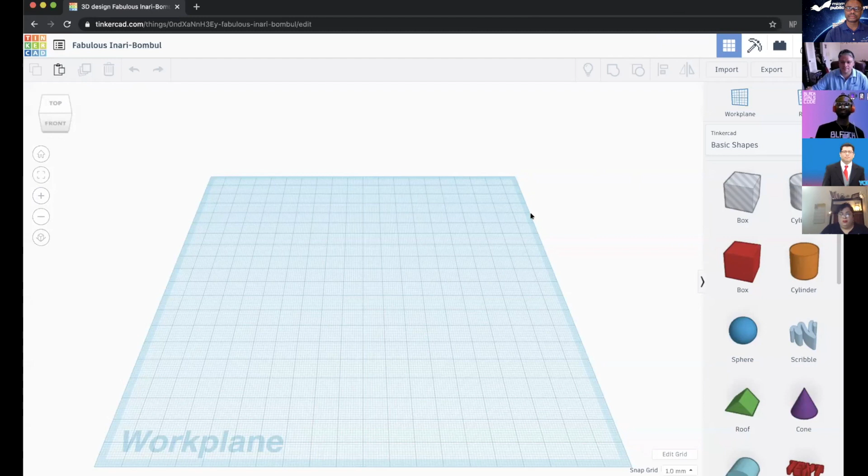So I'm going to start off with over here on the right-hand side. You'll notice that there's a bunch of basic shapes like a cube, a sphere, roof, etc. If you click here where it says basic shapes, it'll have a little drop-down menu of different categories of shapes that you can choose from.

For example, if I were to go to text and numbers, if you wanted to make a name tag or have some numbers in there, you can drag some text and change what it says, like a little keychain or something. Another example is under characters, you'll have little hands, some glasses, a little ice cream cone. These are all pre-made objects that you can bring in here and combine together to create new shapes.

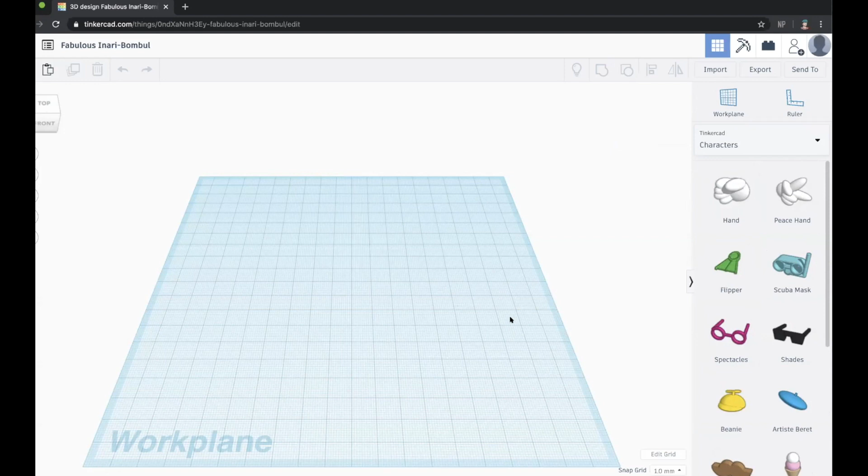For now, we're just going to start with something really simple like this box. To bring the box into the plane, I'm going to click and drag it so that it's over here and let go. Once we have our object in the plane, you'll notice this little window pops up.

At the very top, it says solid and hole. Now what hole is, if I click on that, you'll notice that it kind of goes transparent with these little lines going across it. This will come in handy when you're manipulating shapes later on, because if you want to create a hole inside your object, like a cube-shaped hole inside another cube, you can do this to create some negative space in your project. For now, we're just going to stick to keeping it a solid.

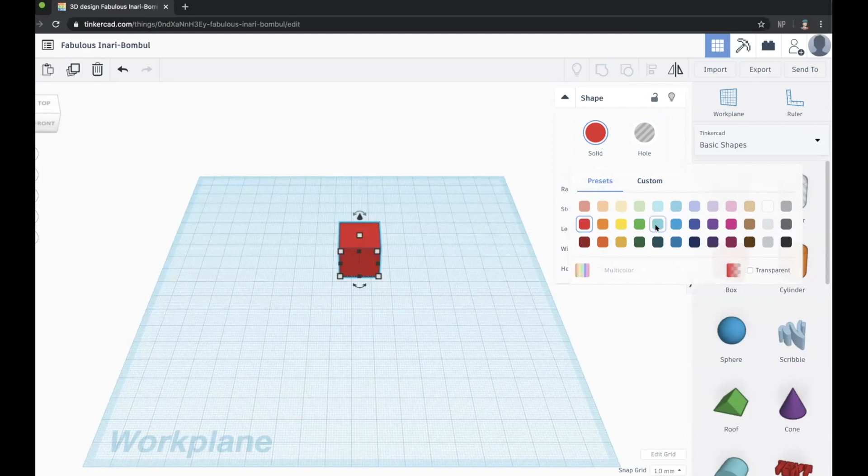When you click on solid, you'll notice there's a whole color palette that shows up. This is really for your own point of reference. This isn't going to affect what color the object is going to be if you choose to print it later on, because that's what you pick a filament color for. But for now, you can just go fun with it and pick whatever colors you like, just for your own viewing. Right below solid, you'll notice there's a couple more properties here. This one here is radius.

You know that a square has these sharp edges. When you manipulate the radius, it kind of rounds off the edges a little bit and makes the corners a little smoother, so the more you drag it, the higher the radius, the rounder it's gonna get. Then down here with length, width, and height, this will make it more of a rectangle, make it longer, wider, or taller. These are manual ways to do it.

Another way to manipulate these dimensions is that you'll notice there's these little markers around your object. If you click and hold this little cone at the top, this will move your object up and down, while this one creates this little circle around it, which will help you rotate your object.

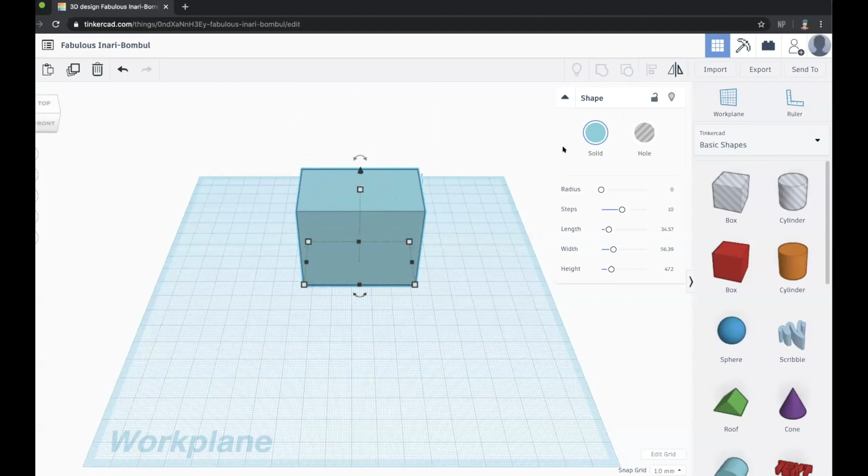Earlier I mentioned going over the different camera views for your object as well, so I'm going to refer to the left side for a moment, this cube that's right here. You'll notice it says top, front, and so forth on it. Let's see what happens when I click on front. You'll notice it moves your plane automatically to give you the front view of your object.

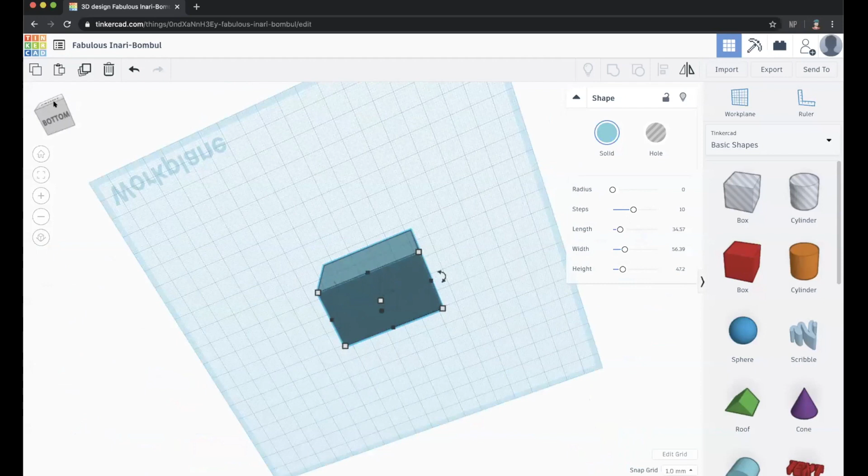If you click and hold this, you can also move it around manually. Clicking on the actual word will snap it to that view automatically, or clicking and dragging it will allow you to move it freely. This is good so you can get different angles of your object as you work on it. If you click on this little home button down here, it'll bring it back to the default view.

Down here, you'll notice a plus and a minus. This is to zoom in to get closer on your object or zoom out to see it further away. Those are just some of the basic functions of when you're getting familiar with your workspace.

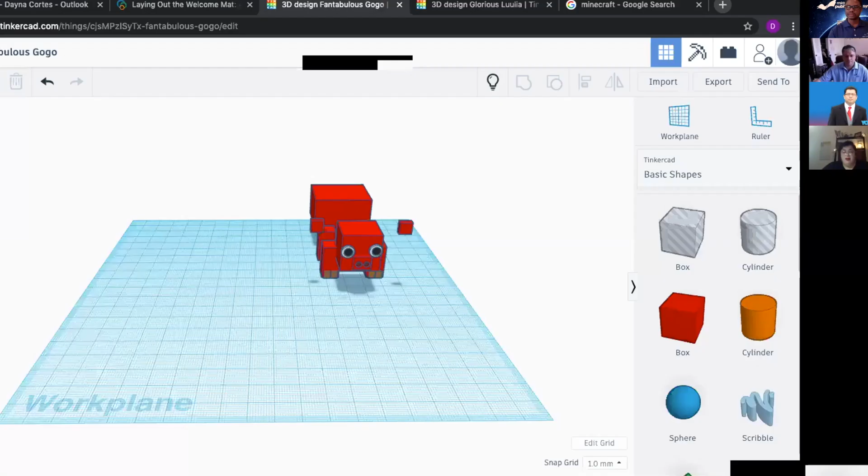Hey guys, I know some of you have heard of Minecraft, right? Anybody who's heard of Minecraft? Type it in the chat. I'm not that familiar with it, but I know the kiddos love it and always play it.

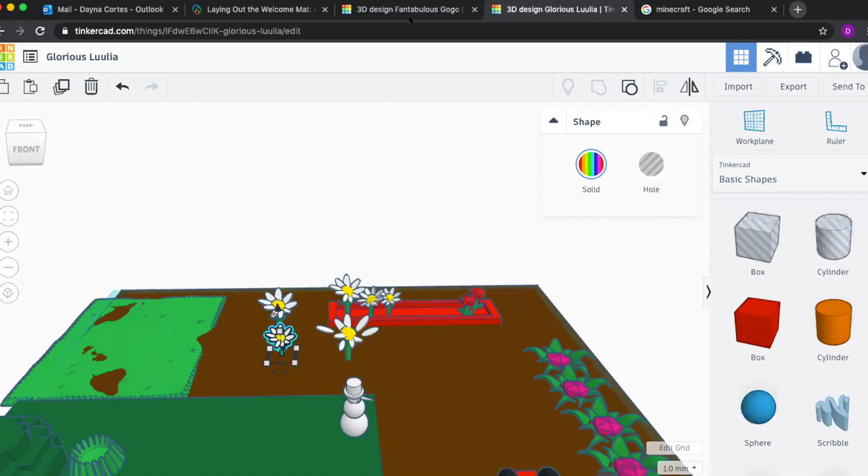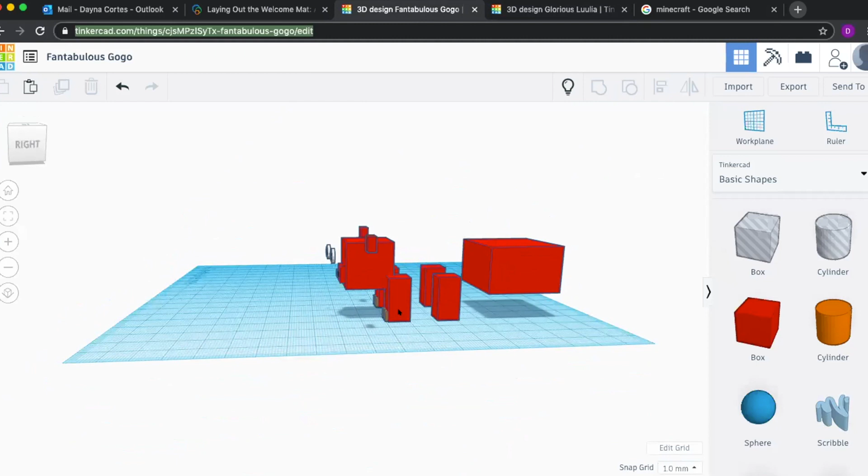So I wanted to show you guys some cool stuff. I got inspired by Minecraft, actually researched it, and got inspired to create my first creature here. Well, he's not a little creature, he's actually a cute little pig. I know he doesn't look like a pig right now, but I wanted to show him in separate pieces so you can see how, with just one object—well, I stand corrected, I actually used another shape here, the cylinder shape. But the body, from the toes to the nose to the ears, is all made out of that one cube. By the way, everybody's saying it does look like a pig, and they guessed it right away.

So I'm going to show you my cute little pig over here. I'm actually really proud of this pig. I wanted to show you guys how, out of these blocks, I was able to create this Minecraft-inspired pig, and it was really fun doing it. It takes me a long time to actually do it, but I know that if I can do it, anybody else can do it.

3D Tinkercad has been really fun, just exploring it with my coworkers, because we've been able to use this feature where we share one link and are all able to work simultaneously, even live, together in this collaborative project that we created.

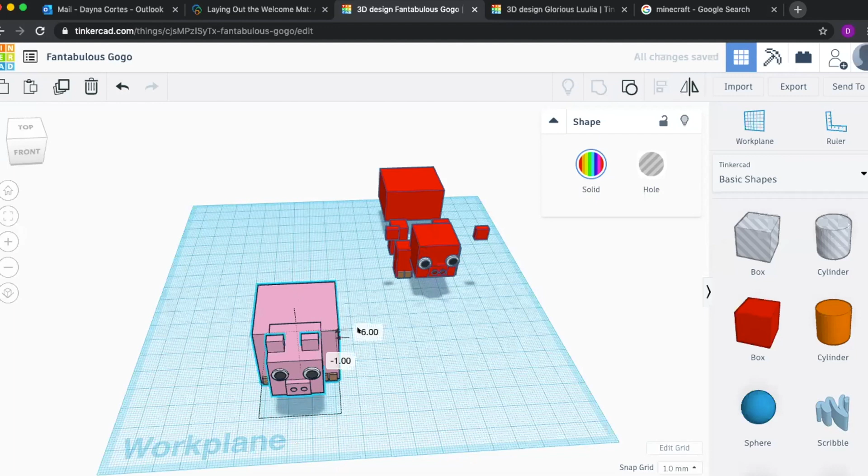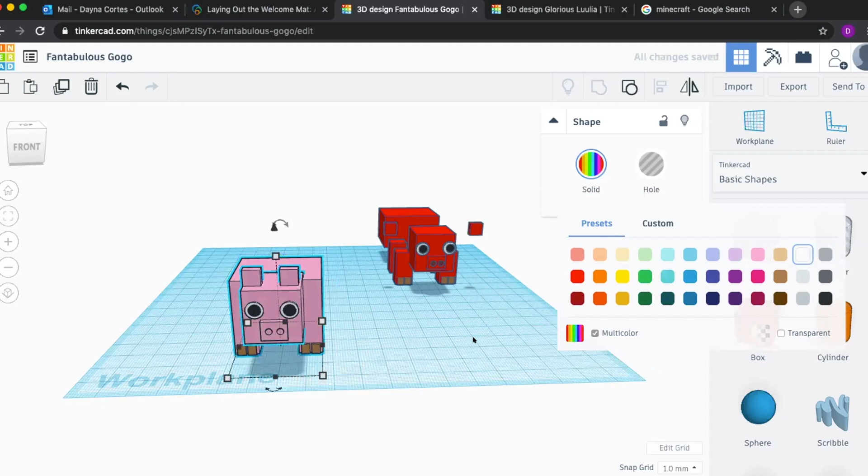So I'm going to bring my little pig right here. Actually, I wanted to show you this cool thing before I move on—if you notice, my pig has all its colors. This cool little function my coworker showed me the other day: he said, I didn't want to group it because it would lose all its colors. He said, Dayna, just go click on the multicolor preset and you're good. So I went ahead and created my cute little pink pig.

Now I'm going to copy my pig. Let's go to our option right here, we're going to copy him, and I'm going to take him to this little farm that we all did together. This farm began with just simple objects, and thinking, what can we collectively do together? So my coworkers Eddie, Hector, myself, and Jaden all worked together and were able to input all of these cool things together. So let's go ahead and paste my pig.

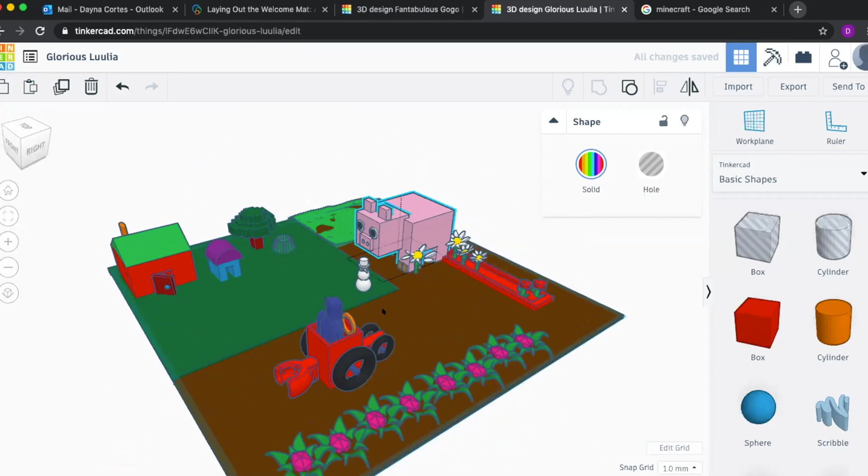Now my pig is out of place and completely out of scale, and he's stomping all over my flowers. So we want to make him the proper scale. Let's click on the Shift button, and you see your little marker here—you hold it down and bring him down. There, now he looks like a pig that actually belongs in this farm.

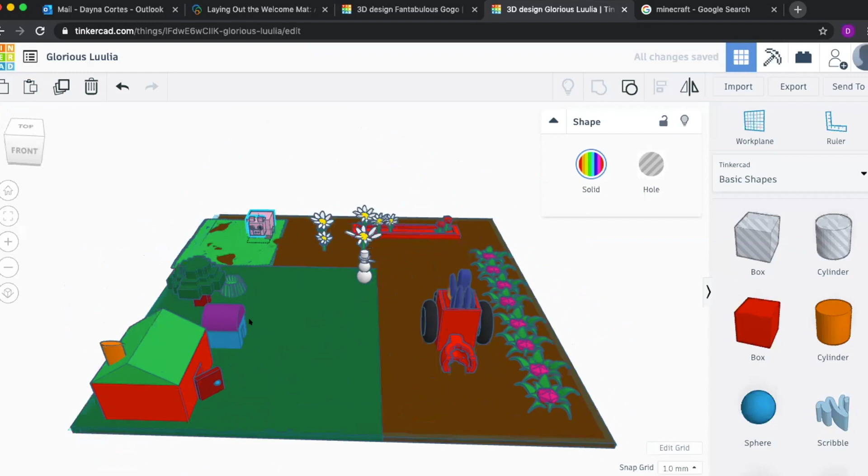So he looks a little lonely. Let's go ahead and copy him again. Let's not paste the other one yet, because if I immediately paste it, then— oh, I actually already did. So let's give him another little friend, let's paste another friend in here. And there you go, he has 3 little pigs.

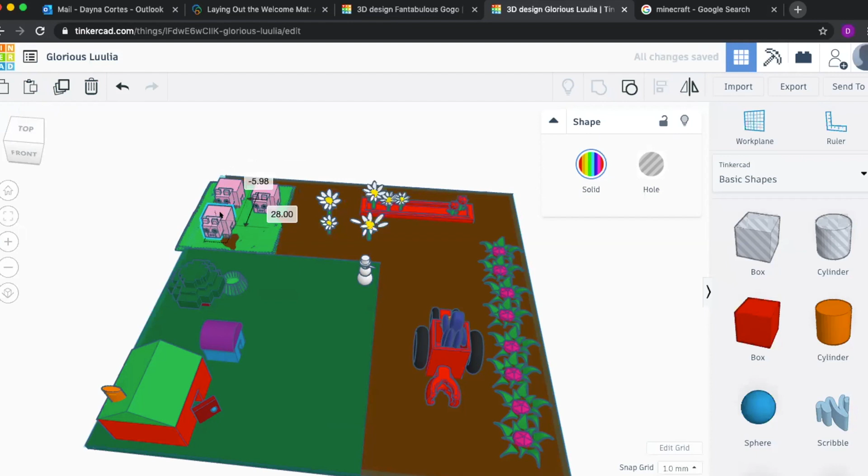So another cool thing—Elaine was just asking, how did you get it to that spot? Just a reminder that you copied and pasted. Correct, I copied the object here.

So you see how he's selected, it's in blue. I go ahead and copy it, and then I could go ahead and just paste him. And there he is. Now he's got 4.

Cool. Any more questions? No, that's it.

Awesome. So I actually also worked on these flowers. It took me a long time to get these flowers. Can anybody guess, just by looking at it, what shapes did I use to make this flower? I purposely left this flower undone so that we could all see it. Someone said oval.

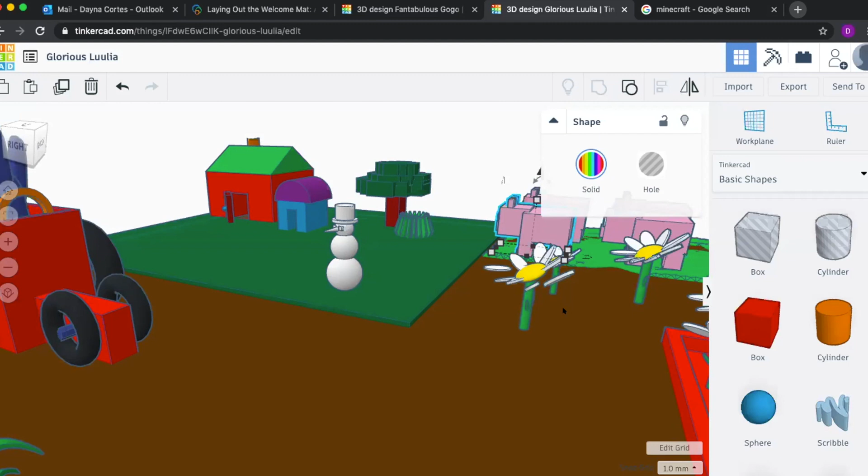What else? It looks like the chat room is saying oval. That's what everybody thinks, oval, right. I used a cylinder and I definitely used a sphere. So good eye, guys, someone said cylinder also.

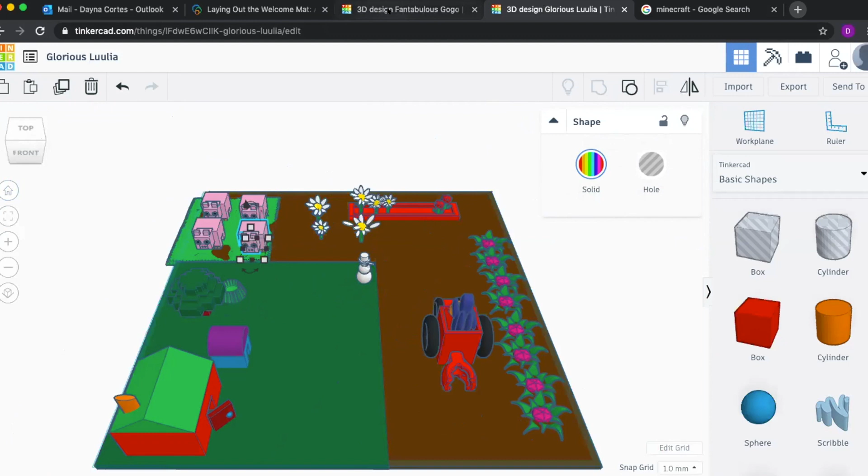So once you're done here, remember I copied and pasted my pig. I copied the pig, I go back to Tinkercad right here. Now it's going to load and see, it's going to be saving your work right here at the bottom. Thank you for that question.

And I apologize for that. You see, once it brings me back to my designing platform, and then I could go into my farm, you see my 4 little pigs? This is in real time, so that's the cool thing about it.

Let's go ahead and tinker this. And voila, I'm back here again, and I have my 4 little pigs, and that was easy, right?

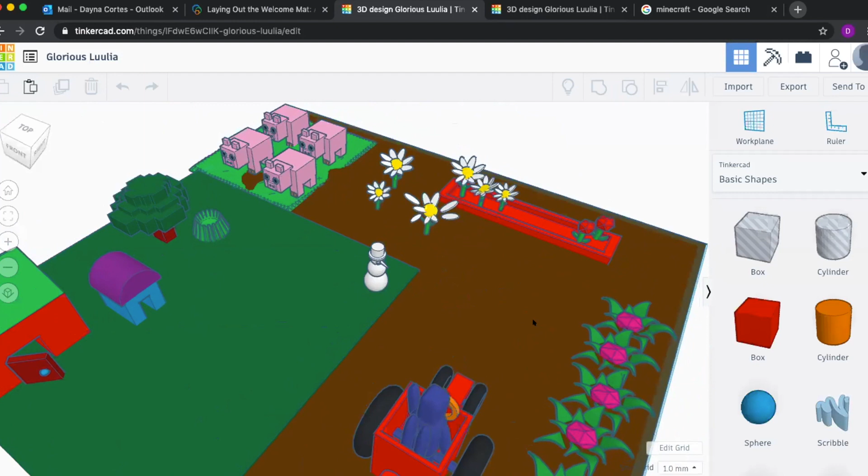Mm-hmm, awesome. So now that I'm done with this part, I'm gonna go ahead and pass it over to my coworker, Eddie, and he's gonna show you how to create this cute little house over here. Eddie, you ready? Yes, I'm ready.

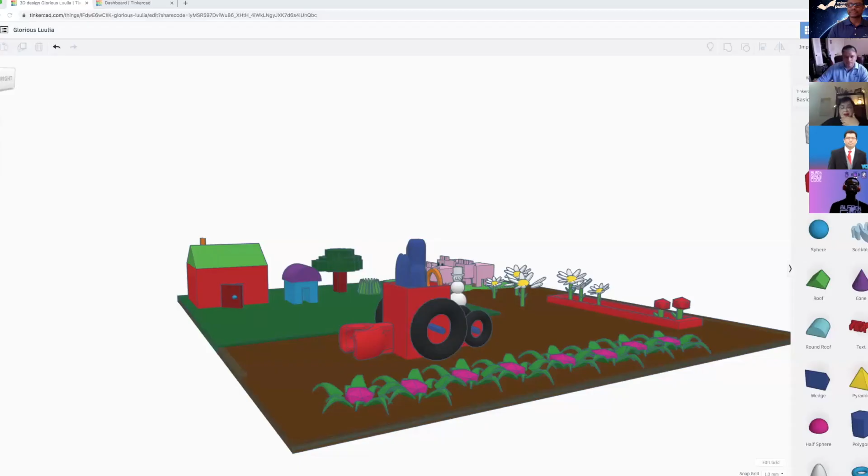By the way, we see you guys have some questions, so we'll take some questions if we have a chance at the end. I see one person's asking about Blender. That's right, Blender is a pretty cool platform that I know that if you start using like Tinkercad as a beginning tool, you could really start helping yourself to build skills into Blender. I haven't personally worked with Blender, but my friends who have, that's what they keep telling me, like you really have to practice, and Tinkercad is a good beginning.

All right, so can everybody see my screen? Yes. Excellent, so thank you very much, Dayna, for your wonderful explanation on how you created the little pig. Now we have 4 pigs there. And as you can see, these flowers that she created are all grouped, which is very interesting.

When an object is grouped, you can move it around just like this and place it. And if you look up here, this little button, when you highlight something, this button here is ungroup, which is Control-Shift-G. If you press that, then you could ungroup it, and then you can manipulate the object separately.

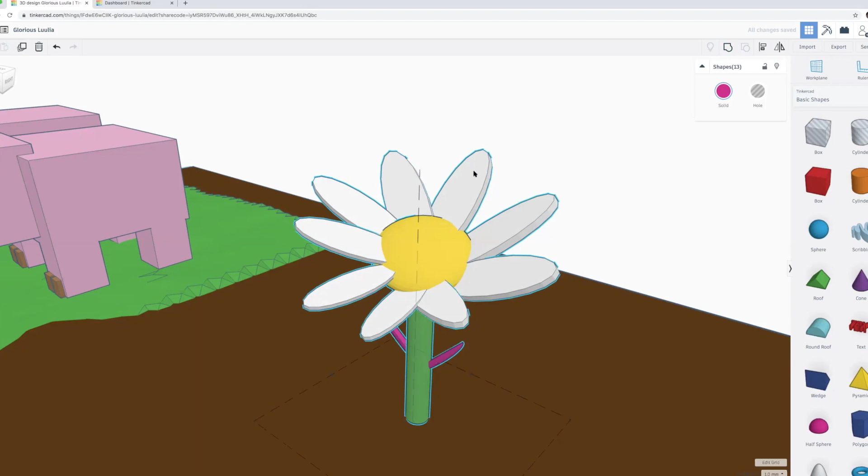I don't know why it's not doing it right now. Nope, doesn't want to do it. But this one's already ungrouped. So over here,

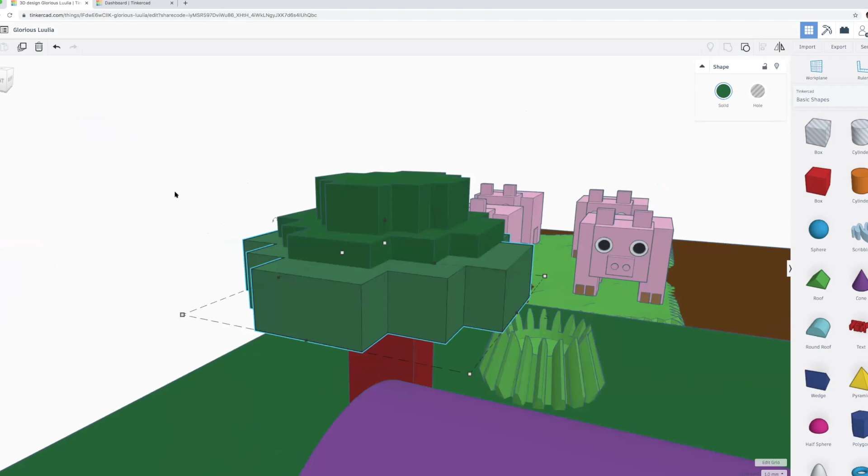I'm going to show you guys some of the Minecraft inspired objects. This one over here is a Minecraft inspired tree. As you can see, it's made up solely of blocks, multiple blocks, and it's only the box. I literally just made this out of boxes and I grouped them together.

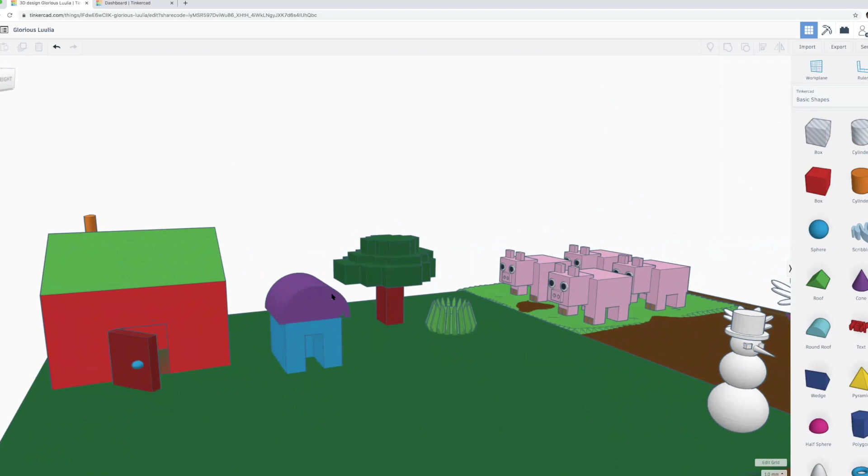And I'm gonna show you guys one of the other objects over here is this barn. So there's 2 different types of barns here. One is a simple barn with a curved roof, which is like a round roof. And if you can see, there's an empty space inside of the box over here.

And I'm going to show you guys how I did that. And then over on this one, you see there's a negative space created indoors to the barn as well, and a little barn door that's curved, that's sticking out. So I'm going to show you guys how I did that.

And one of the beautiful things about doing this is you can make almost anything that your imagination can come up with. And as Marlon was saying, it does tie into the creation of video games, artwork, architecture, all sorts of different jobs that you can be doing.

So I'm going to take the box. I basically just dragged it in, just like Jaden explained. And I'm going to shape it. Now there's two ways to shape. One is just by dragging the corners and making it the size you want.

Or you can go here and manually type in the length, width, and the height if you have exact measurements that you want it to be. So I like just to drag it.

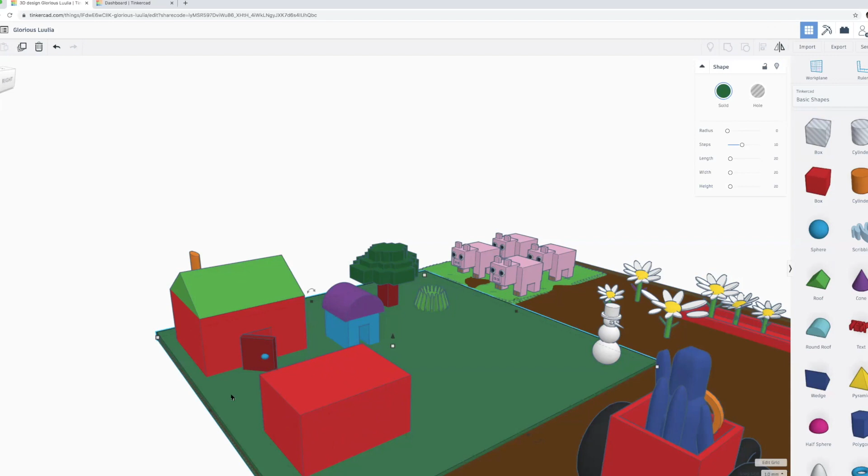Now, one of the neat features is this is the Workplane, and it's where everything you drag onto here is going to be basically touching the bottom, the Workplane, where it's at right now. So right now my roof is on the ground, and I can place the roof by grabbing this little arrow and moving it up and then dragging it.

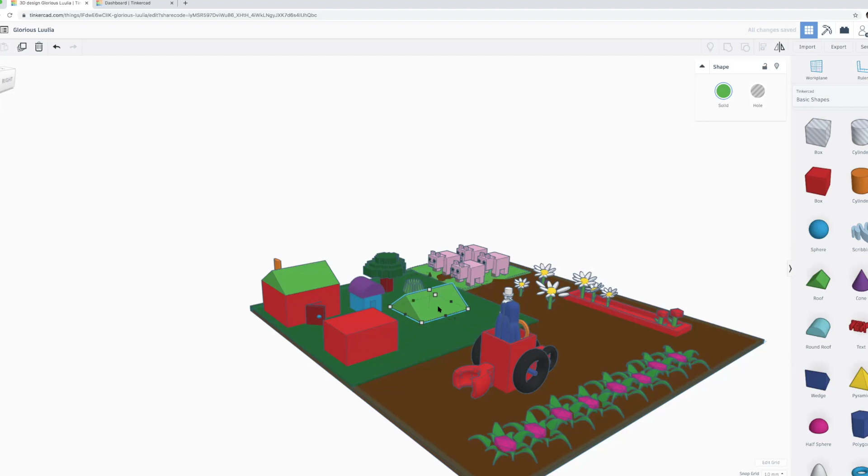But that's kind of hard to do. That's one way to do it, but that's not the most accurate way to do it. So one of the neat features I'm going to show you guys is this: you can actually change the Workplane by clicking up here, and the shortcut is W.

And when you click on it, you see that wherever it goes, it changes. See, right now it's on the side of the pig. You can actually make the Workplane the side of the pig, but I'm going to make it up here. So if I click on top of this box, now you can see, the Workplane is up in the air.

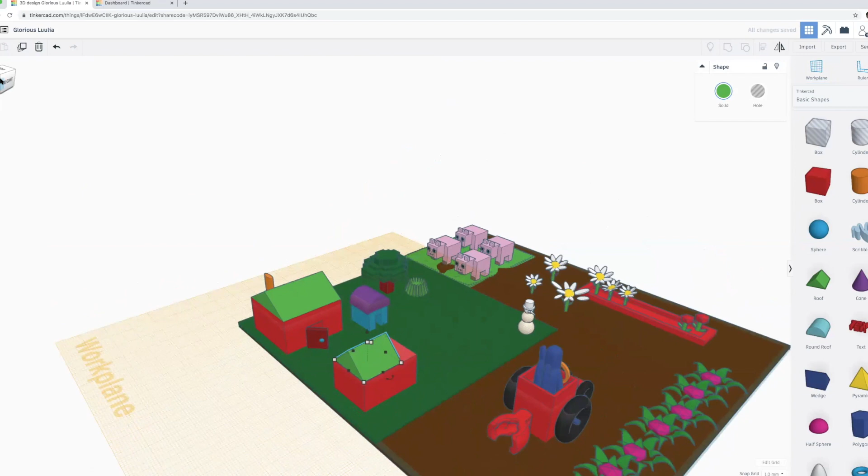So when I drag something onto here, which is going to be this roof, it's going to be up here, all ready to go, perfectly on top of the house or the barn where I want it to be. And then I just drag it to fit the right size.

That's pretty cool. And it makes it easier. It makes it easier. So you don't have to be manipulating too much.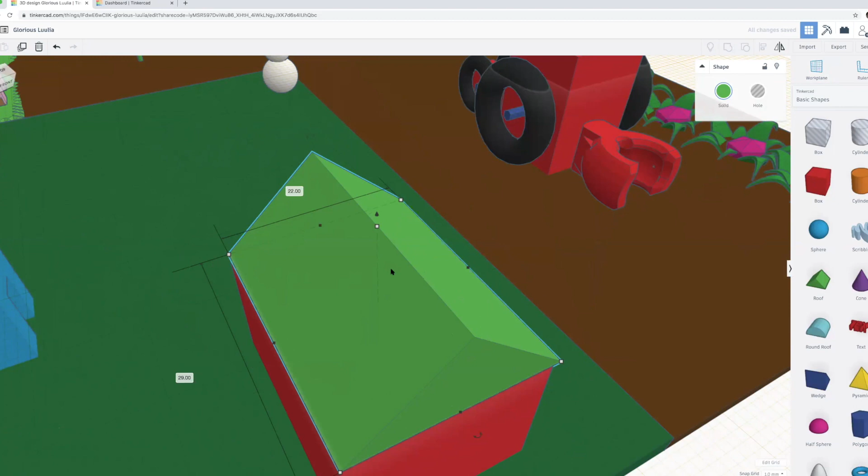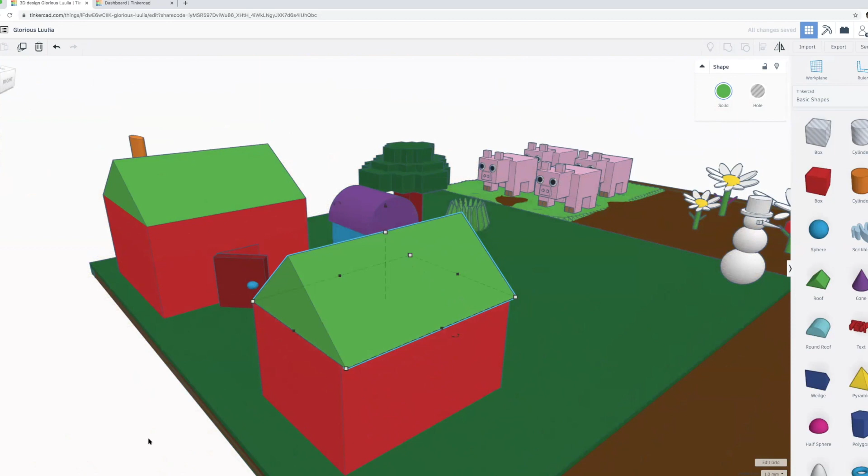So the important thing is you do have to change the Workplane back, because everything you put here is going to be at that level, and I don't want that, because that's going to get a little confusing. So you have to click on Workplane again over here and bring it down so that, see where it turned blue? Now it disappears because that's the floor, so everything I place is going to be back on the bottom.

And I'm going to bring out another box because I want to create this door. You can see the box is pretty much a staple shape over here. You can make the door, bring it down.

And how did I get the door to turn like that? There's these little arrows on the bottom here. You can kind of just turn it, and you can change the degree. This is how you can manipulate that.

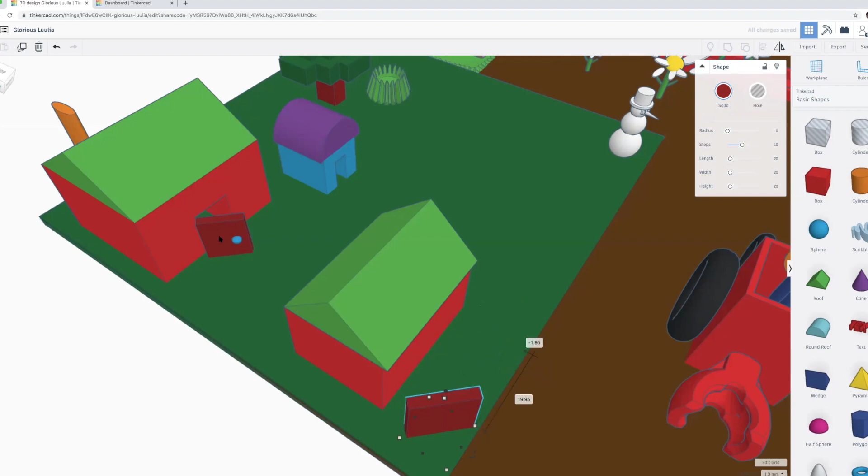So now I'm going to change the color to brown and bring it in. But there's one thing I forgot. I forgot the doorknob, and then I forgot to create an empty space inside. So I'm going to show you guys that real quick.

Take the box and go in.

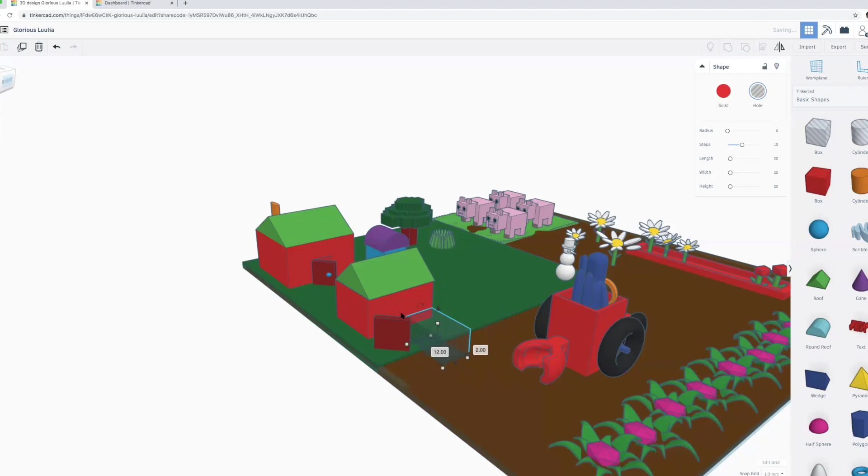Now you notice I'm constantly adjusting the view. And that's one of the beautiful things about working in 3D: you never have to be stuck with one particular view. You get it to just where you want it so that you can get the job done. In this case, if I use this tool here to the left, I can zoom in, I can zoom out a little bit.

That's about right. So now I bring this thing in, and there I am making this space, roughly I would say, about that size. And then in order to group this, and this is something you have to do when you're going to make the hole, you have to click on the object, hold down Shift, and then click on the rest. So I basically clicked on the roof, the part of the house, and the empty space.

And I'm going to click group over here. Control G is the shortcut. And as you can see now, there's a hole, but the house turned red.

So what did Dinah show us the last time? We click here under solid and click multicolor so we can get our colors back, if that's important to you.

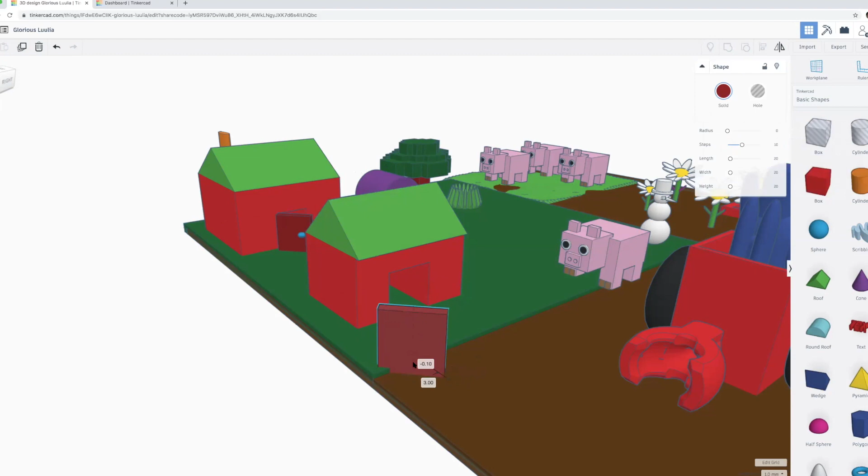Can you show us one more time just how you group everything? Sure, okay. So sometimes this happens, if it loses the thing, you can click refresh and it'll come right back up. This happened a couple times when we were practicing, and it seems to be an issue with Tinkercad, and sometimes it just comes right back, other times it doesn't.

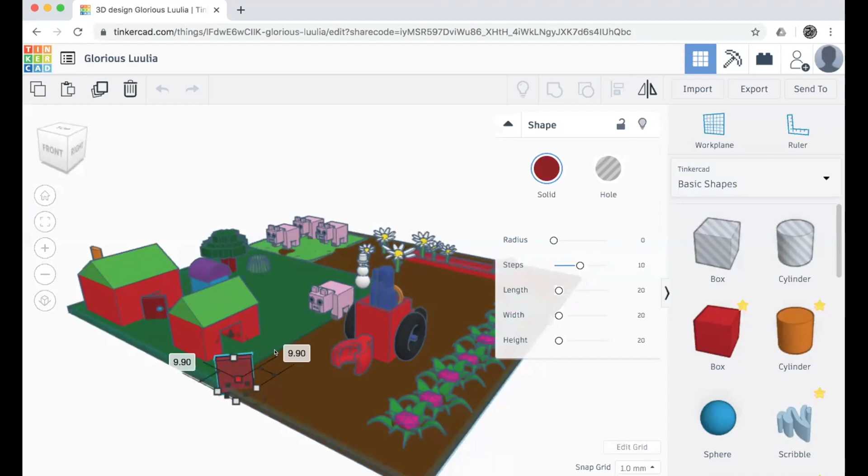Hector, if you can do me a favor, share your screen while I try and fix this, since you're already there. Let me see if I can refresh. Sure thing. Yeah, so you can show it the door and then we can move on. We can take over while you troubleshoot the issues.

This is one of the cool things that can happen when sharing - I'll talk about the sharing option a bit later. Two or more people can work on the same project at the same time. Like right now, Eddie was showing the grouping feature for Marlon and everybody asking about it: you click on an object, then press Shift and click on the other object. Oh, right now it's already grouped.

Sorry, let me ungroup them so we have - oops, looks like it's refreshed. No worries.

Let me switch - I have a backup, so I'm going to recreate the same thing with the house quickly for you. I'm not going to worry about the door. We have the workplane, and I'll put a little roof on top, dragging it right on.

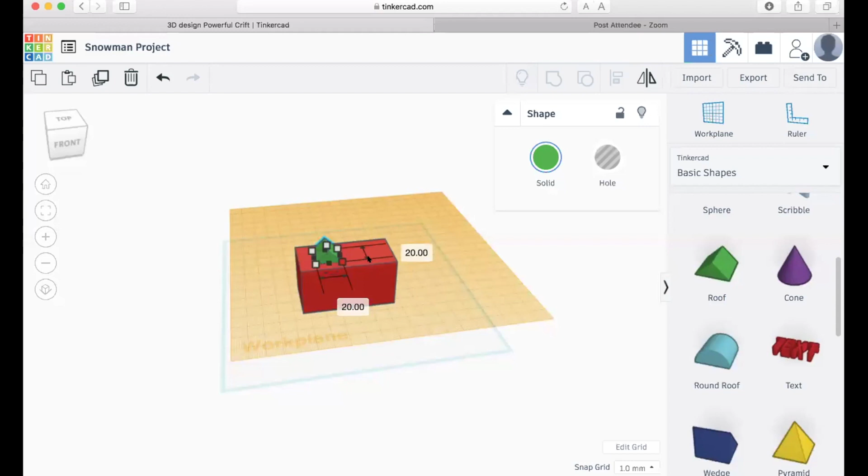I don't know if you noticed, but I moved the pig, or Mr. Bacon as we're calling him. That's funny because I actually wanted a pig named Bacon. Anyways, I'm vegetarian, so I could do it.

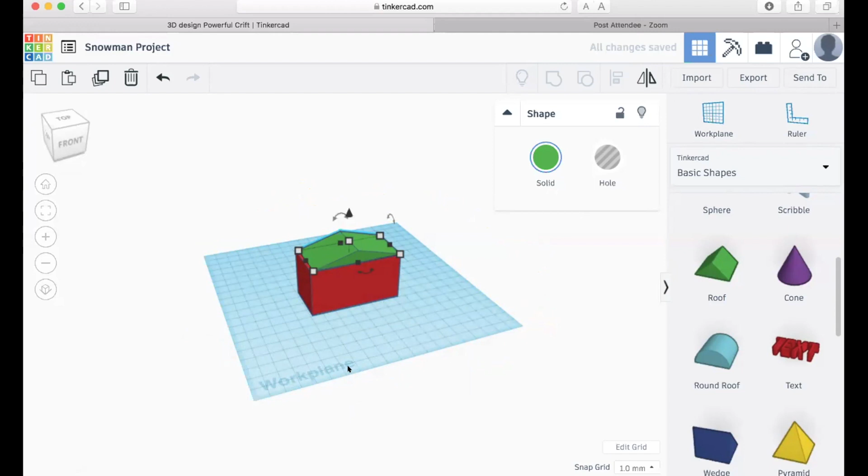If you notice, I moved Mr. Bacon inside, and I can make him live. I know some of you told me to make him big. You want me to stop sharing? No, I'm talking about yours - Hector's screen now. Got it.

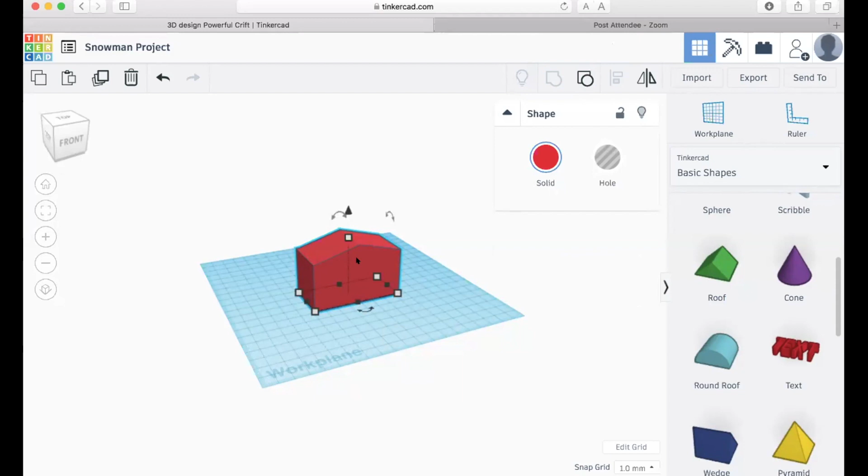So to group the objects, you click on one and press and hold the Shift button. You can click on the roof, then minimize this. Right at the top there's a button that says group, or the shortcut Control G, which groups it together. When you group an object, it turns one solid color. But if you want to keep the original colors, click on solid and click on the multicolor feature, which keeps each shape independent.

Now you have all of these preset colors - for example, I can change the bottom of the house. Let me ungroup them so we can see that better. Click on solid, and we can change different colors. But you're not limited to the presets - you can also customize them.

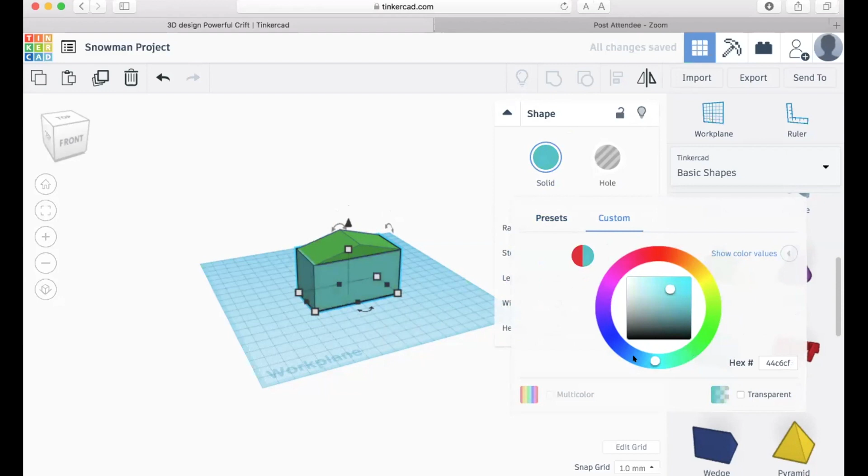When you click the custom button right next to it, you can pick any color you want by moving this button around the wheel, turning it into blue, purple, or red, which is close to what we had originally. When you're done, we group them again - and there's a little house. Let me switch back to multicolor to keep it together.

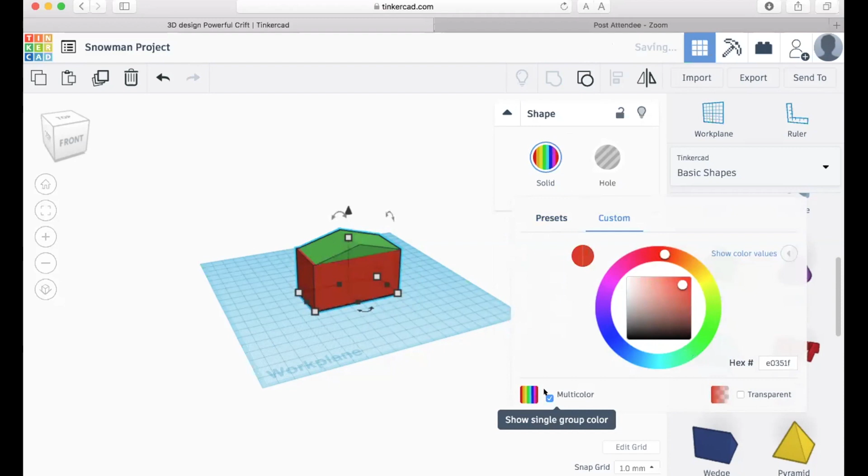Now, what I wanted to show you originally - I'm going to create a new object, a snowman for our little farm. Hopefully we can get the project back on video. You can follow along, and if you have questions, put them in the chat. I'll use the sphere shape right here. Let me delete this first - to delete an object, select it and either press delete on your keyboard, or use the trash can icon in the upper left corner. I'll click on that so we can start a new project.

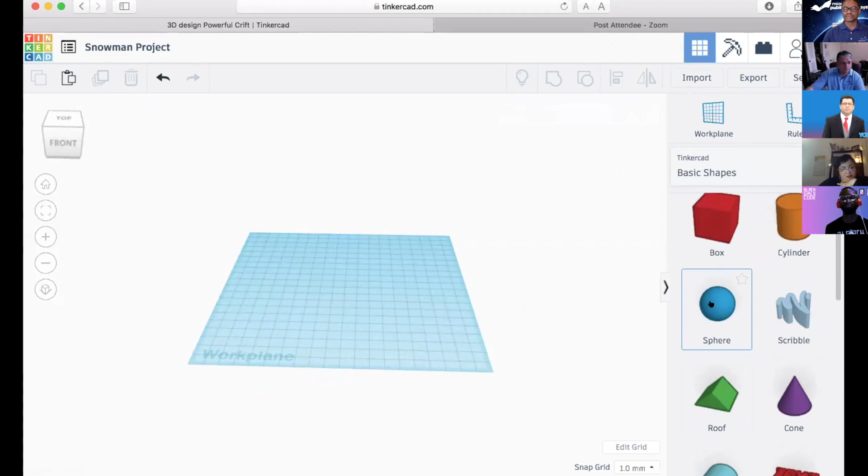And I'll move the work plane so we have it nice and centered. And I'm gonna drag this sphere down into the work plane. And as you can see, there it is.

I'm gonna create the snowman so it has 3 circles. The bottom one is the biggest one. So if you click on this little white button, you see that there's some numbers, and this basically tells you the dimensions of the object. On the bottom, we have the width, then the length, and the top one tells you the height.

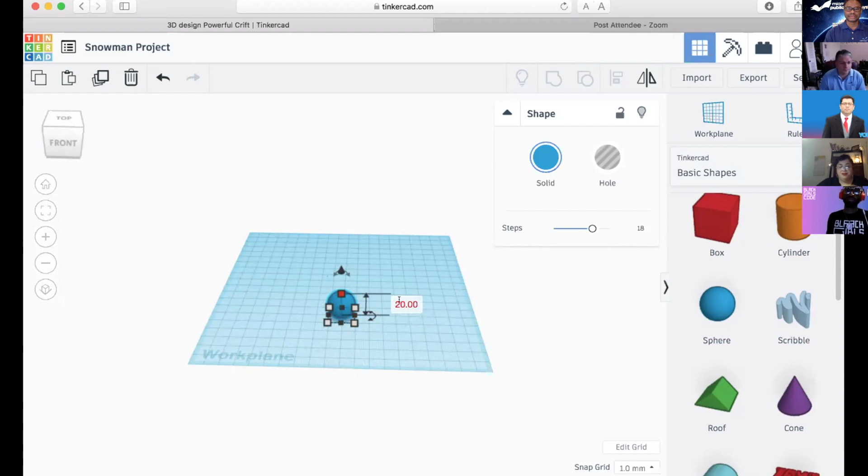So this object, I'm gonna make 32, and I click on the other one, type 32 again, click enter, and 32 on the bottom one, and click enter again. But if it's a snowman, I don't want this color, because obviously a snowman is white.

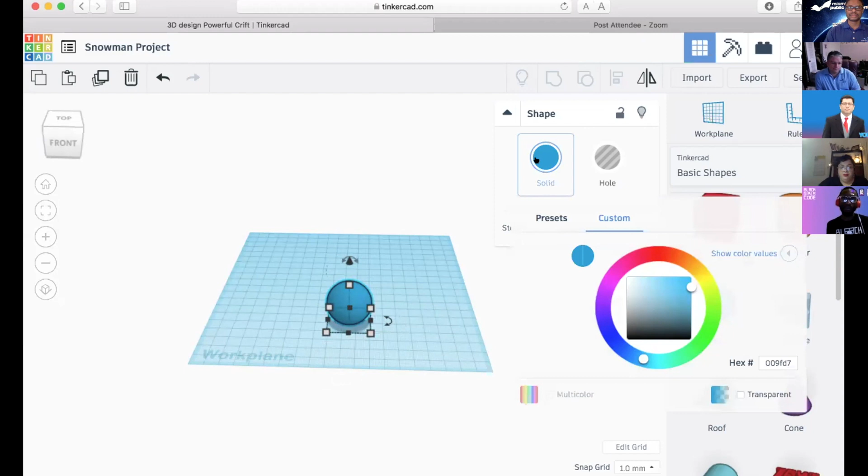So now I click under here where it says solid, and I'm gonna go to the presets because we already have a white over here, and click on that one. And you see we already have the bottom part of the snowman.

You can zoom in a little bit closer because this is far, by clicking on this button or the shortcut F to fit the figure into view. So I'm gonna do it right now so we can get a little bit closer. There we go. Maybe back up a little bit. You can zoom out by clicking the minus button.

So the easiest way to duplicate this is by clicking on this button right here. Control D, or duplicate, will copy the same object, but it puts it right on top of the other one. So in order to see it, I have to move it, which is what I'm gonna do. I'm gonna click on this little arrow, click and hold, and move it up.

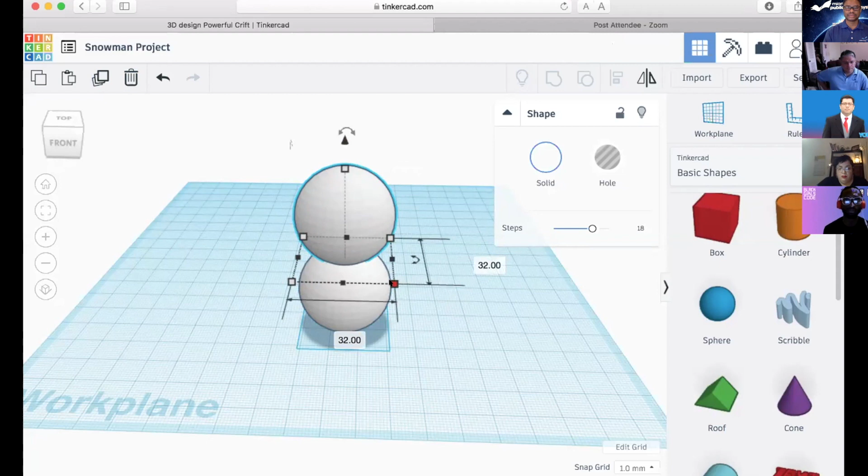And I want it to be attached to the body, so that's it. But of course, I don't want it to be the same size as the bottom one, which is the torso. So I'm gonna change the size again, click on the white buttons, and I'm gonna click and have 24. Go into the other one, 24. And on the top, also 24.

And you see something happen, it looks a little bit crooked, but don't worry about it right now. I'm gonna go ahead and fix that later on. Right now, I'm gonna work on the head of the snowman.

So once again, I click on the middle part. Make sure it's selected. When you see this little blue outline, you know that you selected that object. I'm gonna click again on duplicate, and I'm gonna drag it up with the arrow. Now the head, of course, it's gotta be a little bit smaller. So I'm gonna click 16. Oops, let me move it up so you can see it.

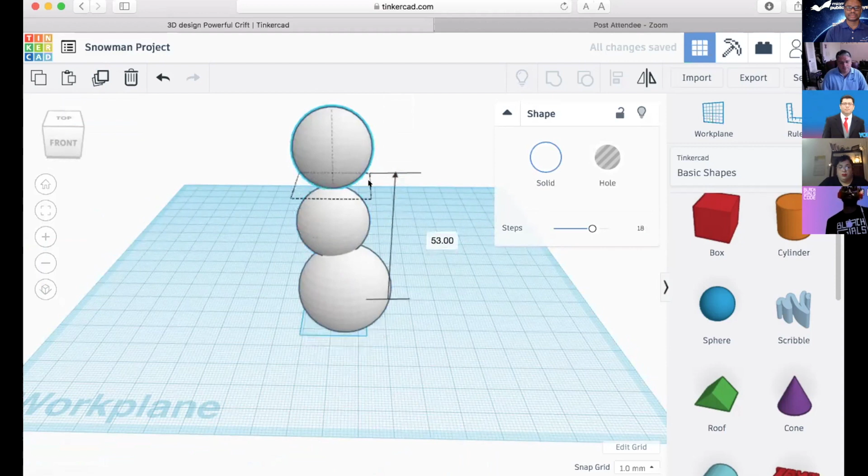16 and 16, and the top also 16, so all sides are even. I'm gonna lower it a little bit.

Now, like I said, it's crooked, but there's a really cool feature in Tinkercad. So when you select all of them, I click the first head, then the body. If you press and hold the shift button, it allows you to select other shapes. So press and keep holding shift. So now I have the 3 parts.

And if you see on the top right, we have the align button right here, or the shortcut L. And when you click on it, you get these little dots on the floor, which allows you to align the object in whatever proportion you want to use. But I want to center, so front and center will be this one.

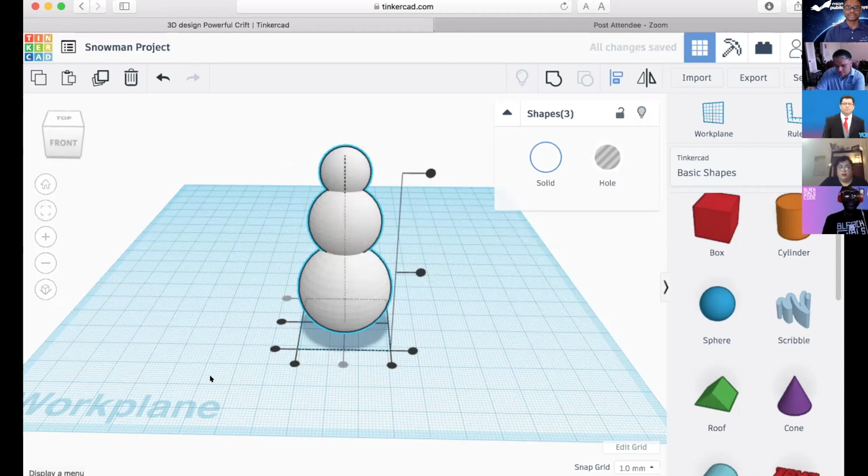And I want to make sure that I look at it from multiple sides. So I can look at it from the cube right here, turn to the other side. You see he's leaning back, but I want him to be looking straight on forward. So click again the middle button. Now it's aligned to the center facing front and back. And that's good. I click the escape button on your keyboard and you can get out of that.

Now let me drag the little cone. I click and drag the cone to create the nose of the snowman. And I'm gonna make this really small. I'm gonna pick 5 for the width, 5 for the length, and let me hide this one. I'm gonna click 14 for the height.

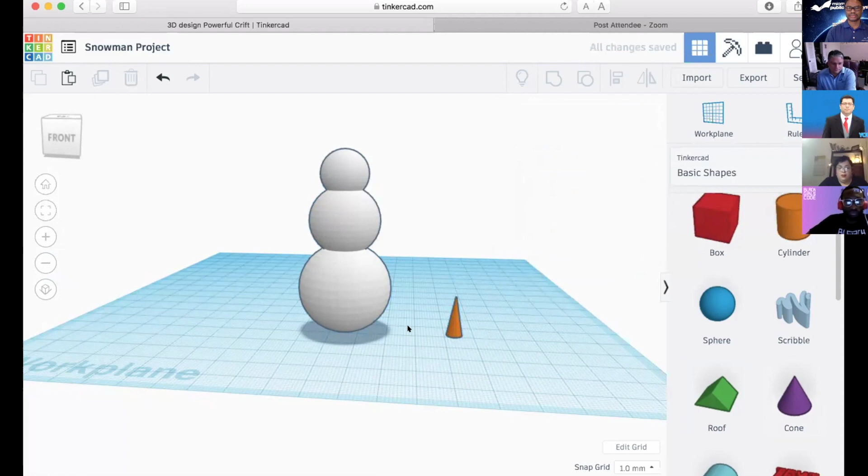And of course, a snowman has an orange nose, I'm gonna change the color. I can go to the shape color. I'm gonna pick orange. So you see the nose is looking upwards and I don't want that. I want it to look forward.

So let me rotate this a little bit so you can look at it here. And when you click on the object, you see these curved arrows, which allow you to rotate an object. And I want it to look front. So I'm gonna type 90, or I can just literally click and drag, but typing the number is a lot easier. I'm gonna click on the nose, drag it in here, and with this little up arrow, I can drag it up.

Boom. And there's the little nose. Now I'm gonna create the little eyes, or actually let me work on the hat. I'm gonna use the cylinder. So for this figure, click and hold the cylinder and drag it in here. I'm gonna create a little hat for the snowman, and change the color to black.

You guys should be experts with this right now. Now I'm gonna make the brim of the hat. So for the brim, I'm gonna type in 22 for one side, 22 for the other one, and 2 for the other one.

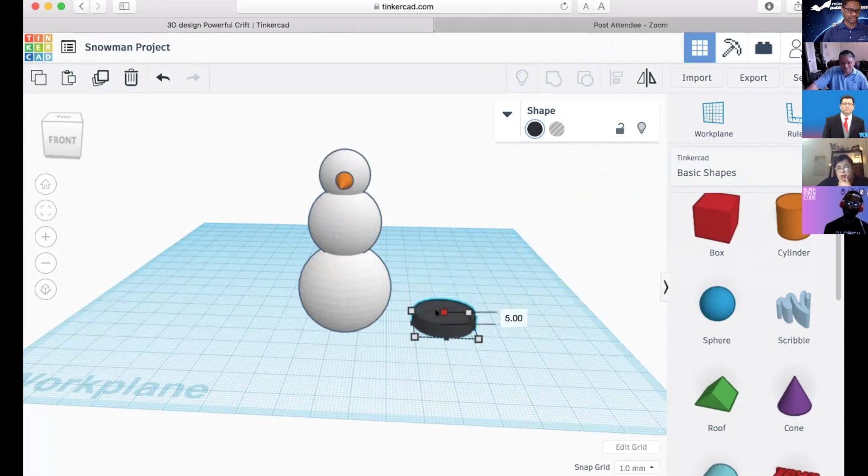I haven't shown this feature, but if you click on the white square, you can literally click and drag to whatever size you want. And I'm gonna make it 2. Oops, sorry. 2, and let me drag it up.

Boom. Now I'm gonna make the top part of the hat, again, another cylinder. I'm gonna put it right in the middle. Don't worry if it's not perfectly straight, we're gonna align it all at the end, like I showed you with the snowman. So click on this orange cylinder, and again, it's gonna be black.

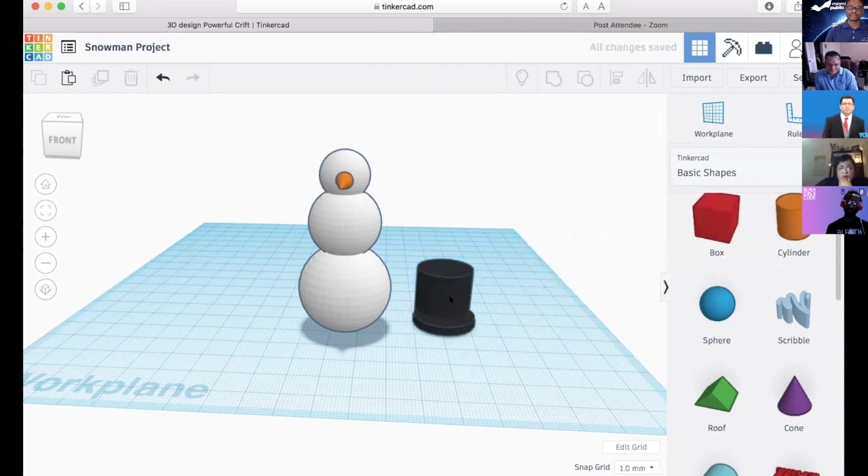And the dimensions for this one, we're gonna keep it simple. We're gonna do 16 by 16. And as you see, it's not straight, so we're gonna correct that.

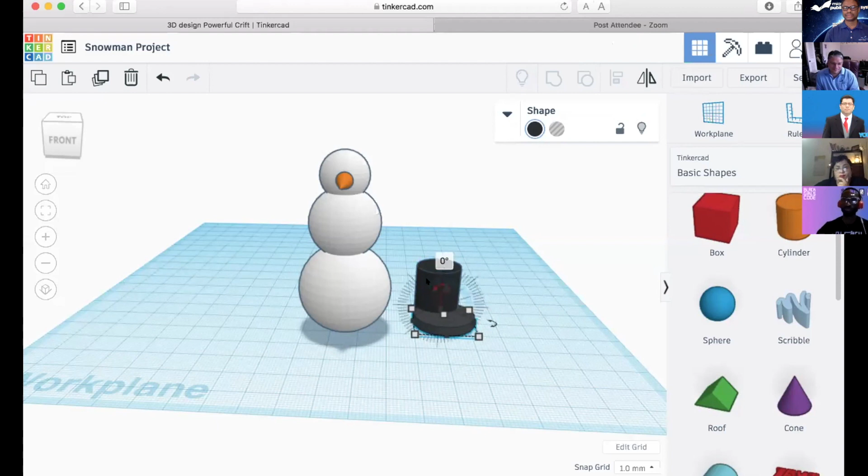You can click on the bottom of the brim, press and hold the shift button on your keyboard and pick the other shape. There we go. And you click on L, or this button right here which is the align button, and again it's the same thing: we click on the center for the front and center for the side. And we can click outside, and now if you see it, it's perfectly centered.

One thing that you want to make sure always when you're working in a 3D plane is to look at your objects from multiple sides, because it can look perfectly fine from the front, but when you look at it from the side, like we saw before, he was leaning back, the snowman.

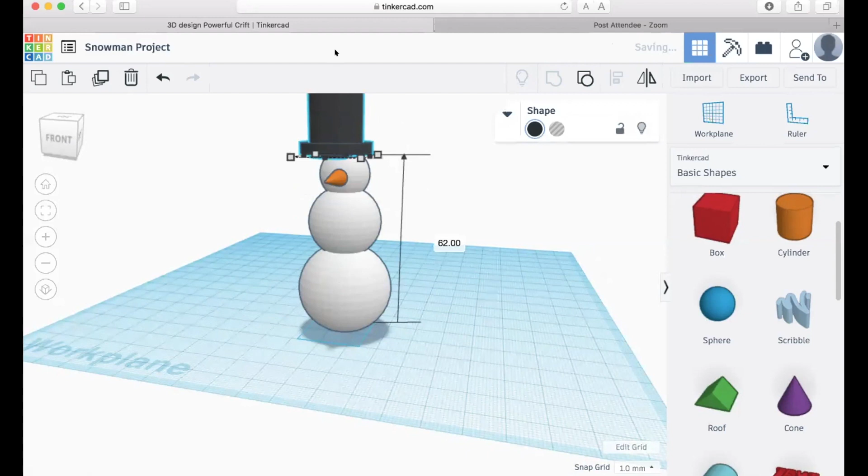So let me go ahead and pick both shapes again with the shift button, and I'm gonna group them. And I'm gonna bring the little hat and place it on the top of the head. Oops, sorry, let me look at it from the other side. It's floating all the way over there. So drag it on top of the figure, and you can let it go.

So you see how you can easily create objects with the primitives, and you have different objects right here. Cylinders, you have the roof, you have the cone shape, you have the text if you wanted to add a text, a really simple way to do that.

Move this to the side. I'll click and drag the text, and can change this. Let me call them Frosty. Of course, of course, so yeah, it's Frosty the Snowman. So where it says text, you can type in your name or anything. And when you're done, click enter.

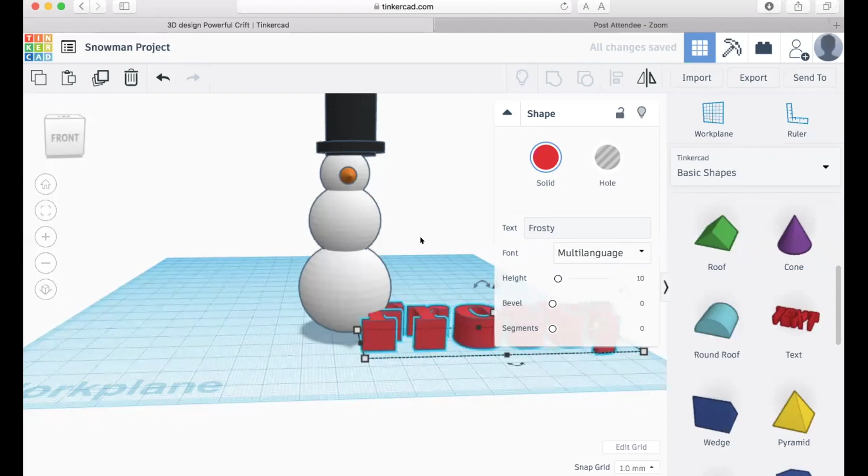And again, I'm gonna rotate it so that it looks front, or you can leave it here in the bottom, whichever you guys prefer. But if you wanna rotate, you can click on this little curved arrow again and literally rotate so that he's facing forward.

So Hector, we have a request in the chat for some eyes on Frosty. Oh okay, do we still have time? Sure, I can do the eyes. I was running a little bit short on time, but I can do the eyes.

Let me actually hide this. So I like the Frosty, but I don't want it to interrupt. So this is really, thank you Eddie, for the question. Oh no, so no, thank you. Thank you for helping out.

On Frosty, if you see this little button right here, which is the light bulb, this hides an object. So you're not deleting it, you're just removing it from the workplane so that you can work on other things. But if I click the little light bulb again up here at the top, now you see the letters come right back. So I'm gonna hide this so I can make it easier for me to work on the eyes.

And let me use the cylinder for the eyes as well. So again, I get the cylinder, let me change the color to black. And the eyes, I'm gonna make them really, really small.

So they're going to be 3 on the side by 3, and not so tall. The tall, I'm going to eyeball it, make it about 9. So you see it's kind of small. Let me, if you press F, it focuses. Step back a little bit. And again, the eyes have to be facing forward, of course.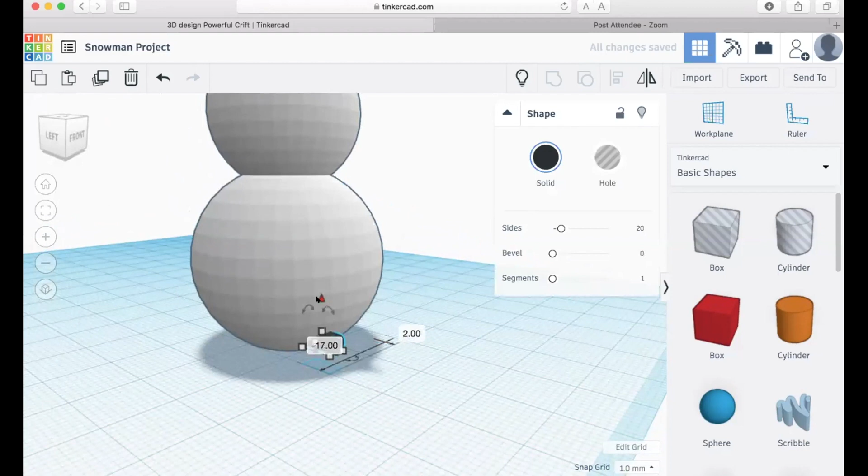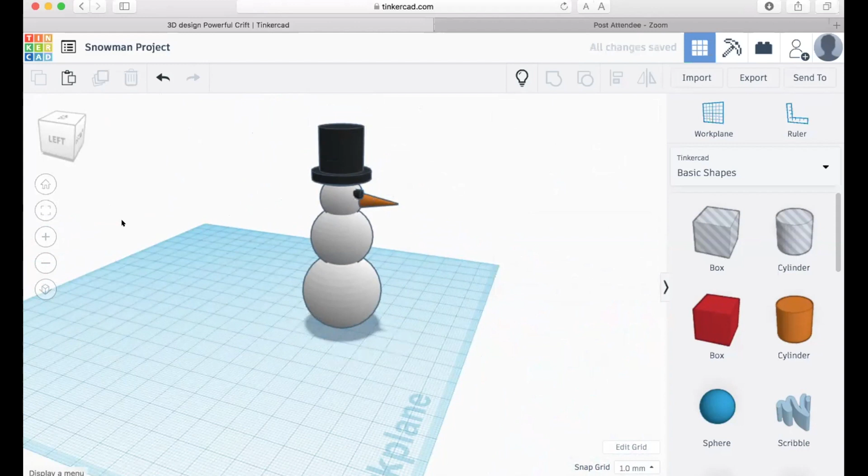There's one eye. It's a little bit out of the face. Click again and drag it inwards so that's nice and flush. Let me move it a little bit to the side. But as you can see, the eye is right there.

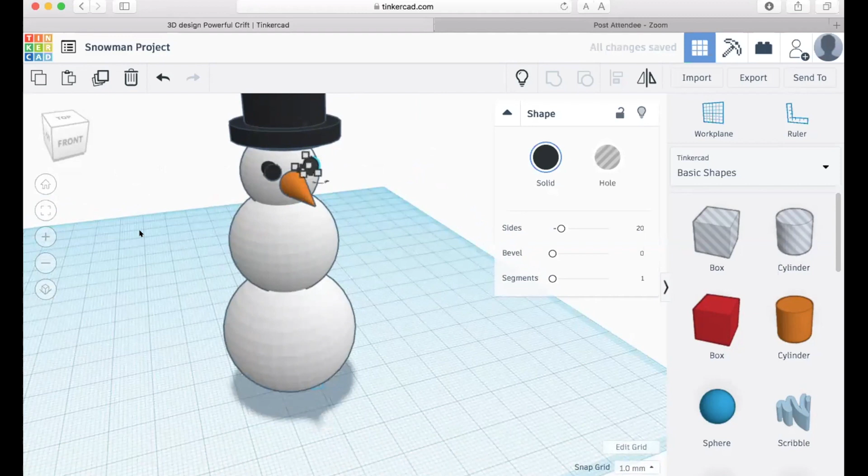Now to duplicate this is really easy because right now it's perfect. You put it in the right place, so it makes it a lot easier for us to just copy it, and it puts it right on top of the other one. Let me undo that and move it right next to that. You see, there's the other eye.

So yes, the transparency — thank you, Dayna, for the question. Let me click on the body. You see how you're working on the body, for example? It's in solid shape as it's seen right here, but if you use the shortcut T for transparency, you're able to make it transparent. You can see the top of the head touching the middle part of the body, and also the bottom part is seen. So everything's all together nice and the way we want it. If you want to bring it back to solid, you type T again, and it brings it back.

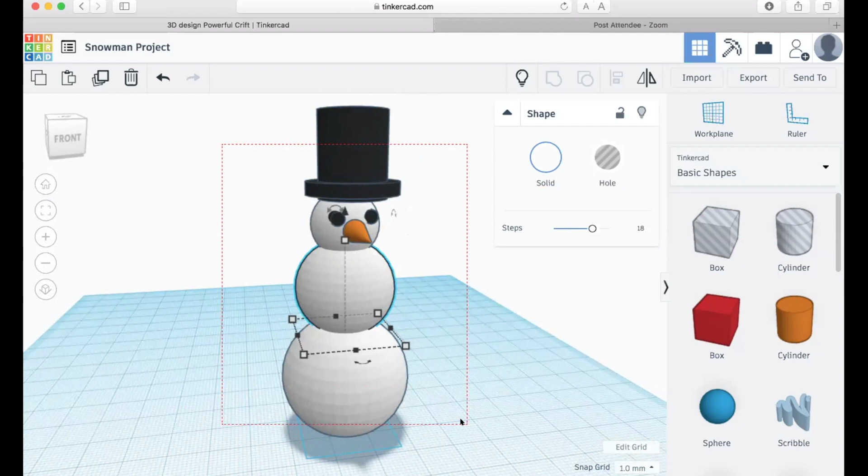Now, once you're done with your project, let's go ahead and make sure we group it. I'm going to click and drag and make a marquee. This is another way to group an object. You click outside of the object and drag so that it covers everything, and you click on the group button, and it's going to turn it all white or black. Let me see what happens. Yeah, it's all white. But we can change back to each original color of each shape using the multicolor function right here.

So now let's say you wanted to share this with your friends, send it to your mom or your teacher via email. When you click on the top button right here where it says send to, it brings you to this little page. You can download a picture of this design and mail it to anybody, and they can open it on any computer screen. You can send it to Autodesk, which is another 3D program, but it's a paid program that's a little more advanced and lets you manipulate the objects. But what I wanted to show you guys is this one: share over IM or email.

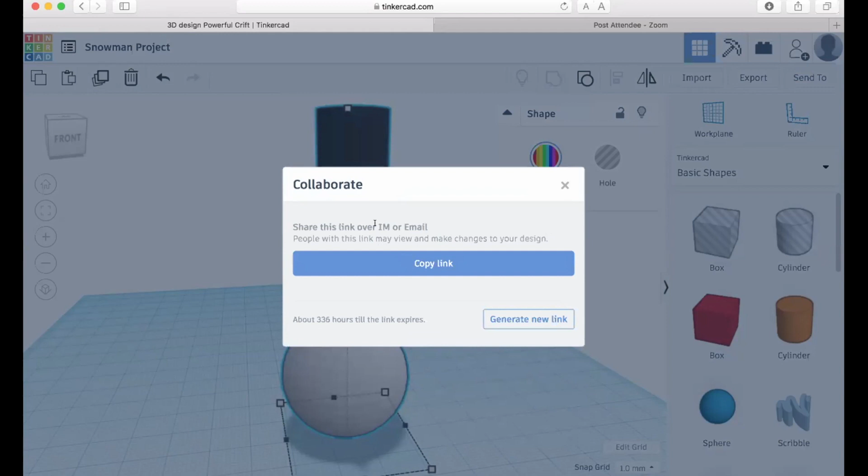And you click on this little button, and it generates a link so that you can copy that link, click this little button, and send it to anybody over instant message or email. That's a really, really cool way. And like I said before, you can share your projects and collaborate with your classmates, like we did with that farm original. Let me see if I can bring that farm back. It doesn't look like it's loading yet. But you can collaborate on the project with your friends and stuff.

Another thing that's really cool about Tinkercad is that you can export your objects to a 3D program or a 3D printer, like we have at UMake. Let me go back to that. You go to export, which is right next to the send to button. You can either export everything in your design, like the whole farm, or just a selected shape, which in this case is my little snowman.

And there's various file formats that you can use. OBJ, which is really popular with other 3D programs. GLB, which is also really good for other 3D programs. But I'm going to save it as an STL, which is the format we use for our 3D printer at the UMake Library in West Kendall Regional Library or Miami Beach.

And you can save it onto your USB, or you can also email it to your email account and then download when you come over to the library. And there's some limits as to what we can print depending on the size and the time.

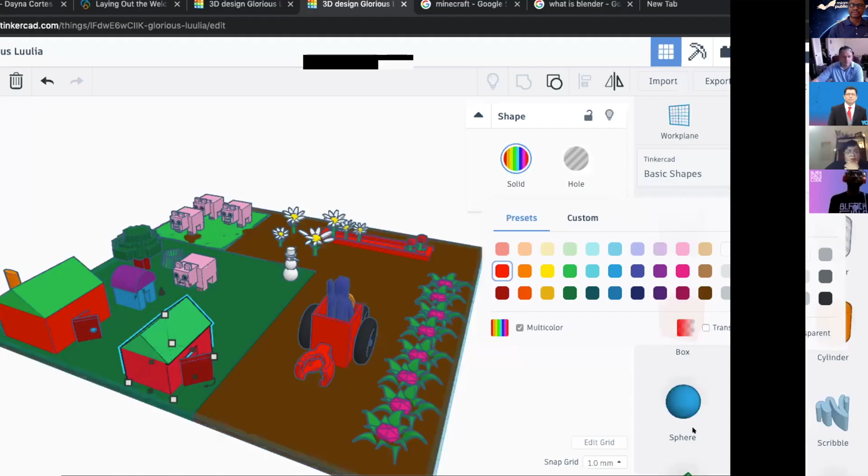While you do that, I know people were talking about Blender. Blender is a really good 3D program. The cool thing is that it's completely free, so you don't have to pay for it. The bad thing is it's a very complex program, so it's not easy to deal with. That's why it's better to start with Tinkercad so you can understand the concepts and work on 3D objects. But Blender allows you to animate an object, a character. You can put lights and light your subject. There's also a sculpting feature, so you can do far more intricate objects with Blender.

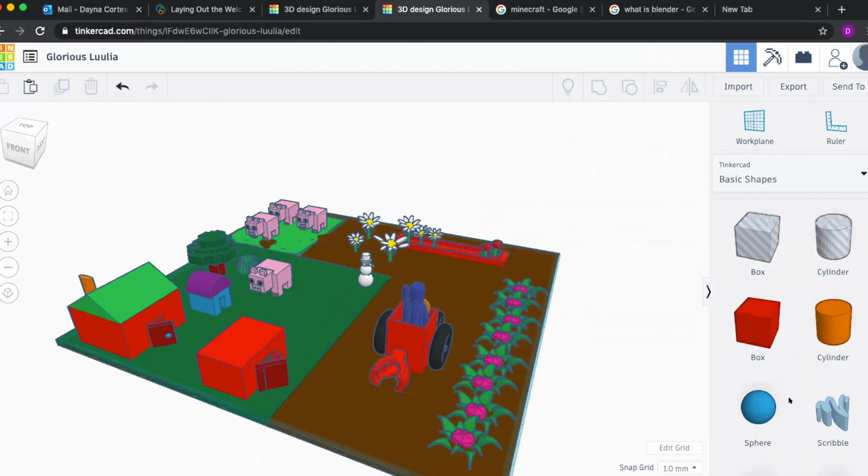Okay, thank you Hector. And so everybody could see my screen, right? Yes. Awesome, okay, so very quickly, just so we could put the roof on top of the barn.

We go ahead and click on the work plane right over here on the right-hand side next to the ruler. We're gonna click on that work plane, and you see how anywhere I go, it follows me. You want to tell it where you want that next shape. So I want that shape right on top of here. Let's go ahead and click it there. And you see this orange work plane? This work plane is now on top of this one figure.

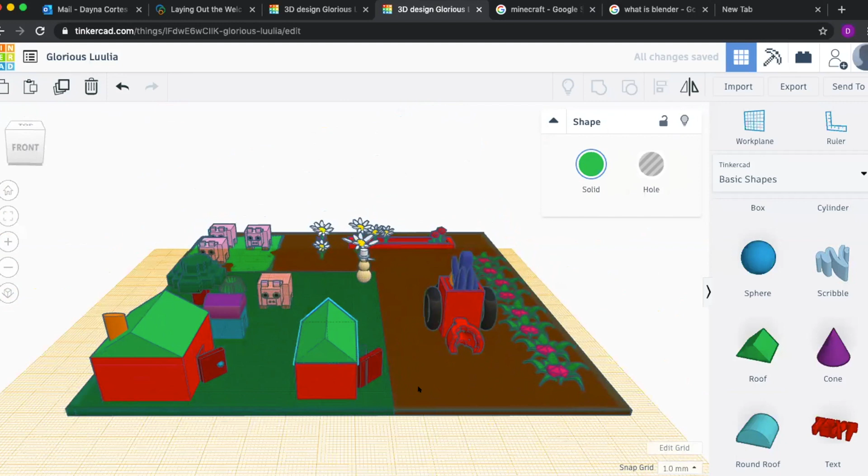So let's go ahead and bring in the roof, and we're gonna put the roof right on top of it. Then obviously you want to rotate around to make sure everything is aligned. You can look at it from different views, bird's eye view. And then once you're ready to move on to the next object and want to get rid of this work plane, click on your work plane, bring it back, and click on that work plane and it will disappear, and it'll bring you back right home.

Okay, any other questions? Yeah, there was another question earlier on how to start a new work plane. How to what? Like, how new, to start a new one. Oh okay, simple, let's go back to our Tinkercad.

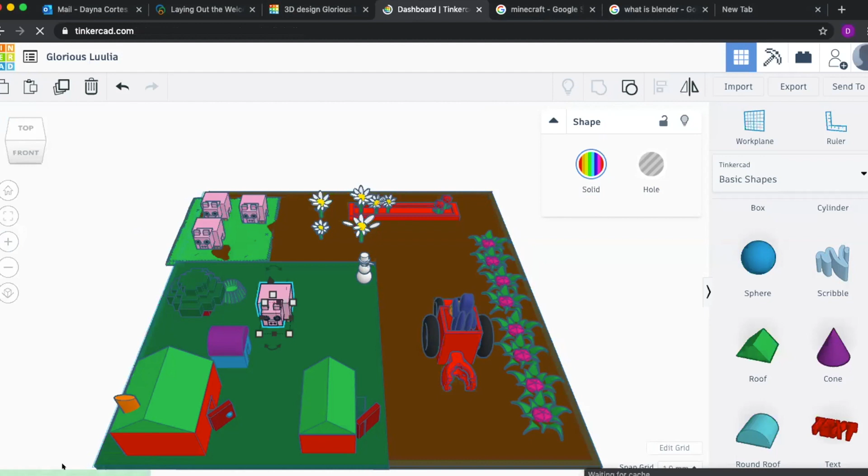And show them the saving, just so everybody remembers about saving. Every time you click here, right in the upper left-hand corner where it says Tinkercad, you want to click here, and it's going to show you at the bottom left-hand corner, it's going to say saving your work. So it's going to automatically save it for you, but you want to click on that.

And then if you want to go into a clean new work plane, create a new design, it will take you to a brand new work plane. Cool?

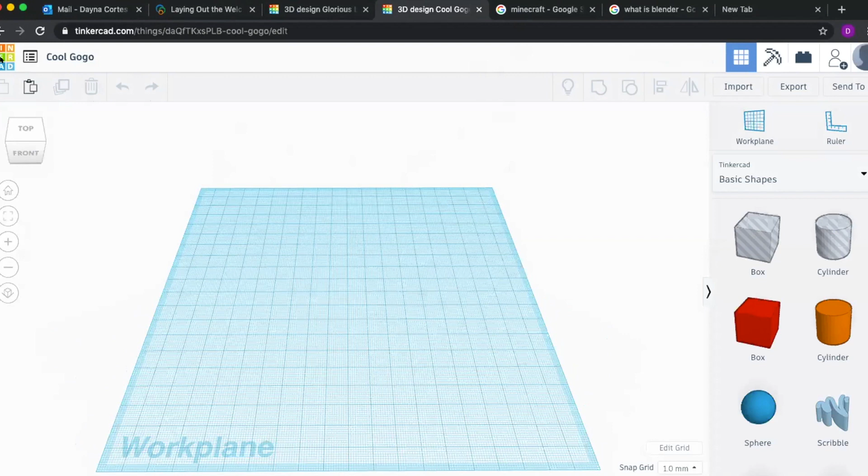Any other questions? Oh, and also show them how they can practice on their own, how to do it.

You will have to read a little bit, but I promise you're gonna be okay. You're gonna go through all of these steps, and once you complete it, it's gonna give you the basics of it.

If this is your first time here, you want to go check out the gallery. It has a lot of cool stuff that other people have designed themselves. You can get ideas of what you can create, and if you get really advanced, you could go beyond just block building.

Any other questions? Yeah, I have one. Like, how far can you place objects up, like high?

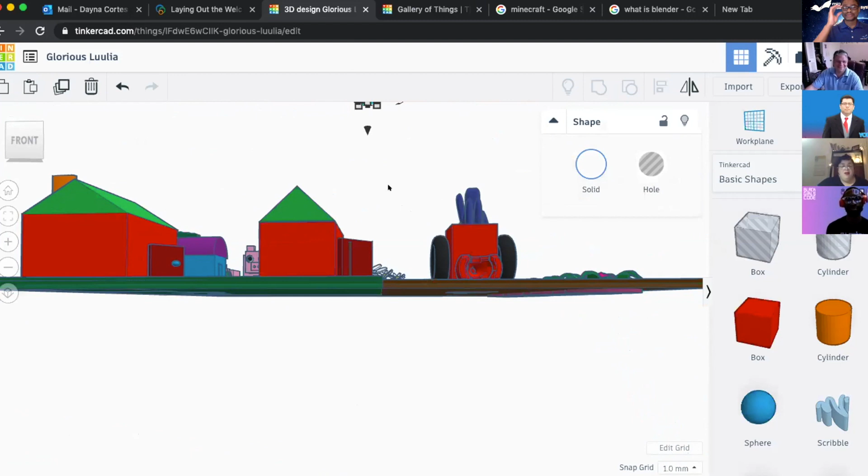Oh okay, well let's do that together. Let's see how far I could do it. I guess really, really high, and I can't see him anymore. Look, he's in another dimension. Oh no, how am I gonna bring him down? Oh, there you go. It's up to your imagination as to what you want to create.

I want to make a statement about why people design things. Let's say you want to be an engineer and make something like a little holder. When you're inside that work plane, you can use the measurements to measure exactly. Let's say you want to build a propeller for an airplane model, or some jewelry, and you want it to be exactly 2 inches so that when you put the earrings on, it's exactly a certain size. You can use Tinkercad to build something measured to a specific size.

We've even had people come into our spaces who printed out screws because some screws inside a piece of equipment broke. They took the screw, measured it, built it in 3D in Tinkercad, and sent it to the 3D printer. We were able to build screws and screw them right into their machine and fix it. So it's really up to you how you want to use this to design different things.

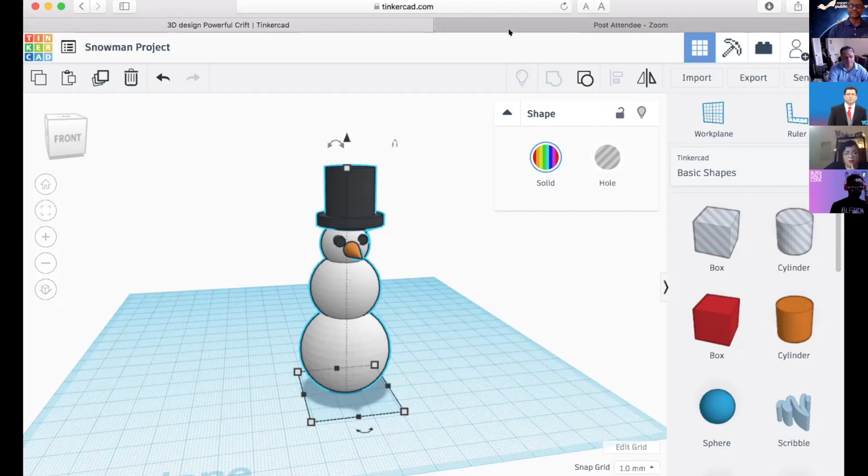Let me chime in a little bit. I know we're talking about possible careers you want to do, and when it comes to 3D design, there's a lot of different careers you can get into. I have a little presentation, let me share my screen. I'm just gonna briefly talk about this.

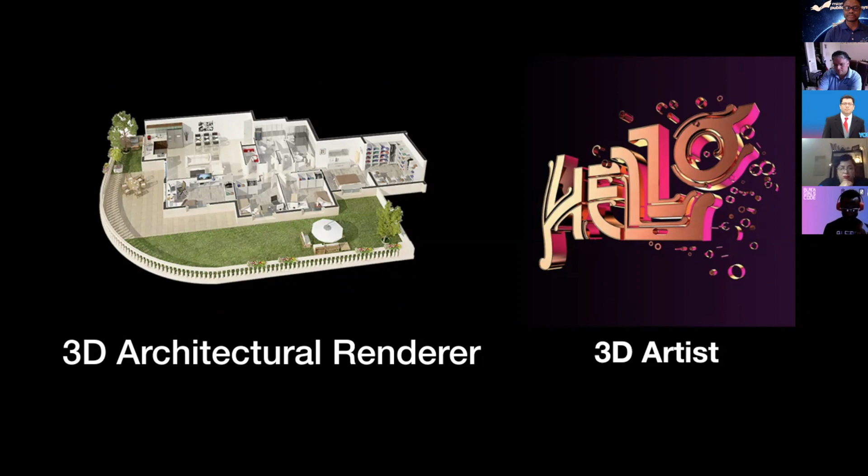There's also a 3D artist, very popular with advertisements and commercials, which is really cool if you're artistically inclined. Finally, a career a lot of kids ask us about is game design. You can become a level designer, which is strictly the environment—buildings, mountains, and the background where the characters interact.

Or you can go into actual character design. As a character designer, you can be a modeler, who creates the actual objects, or an animator, who's in charge of animating the figure and how he or she moves. You can become a special effects person, creating lighting conditions, smog, flame, and water effects. There's a lot of really cool careers you can get into when it comes to 3D design.

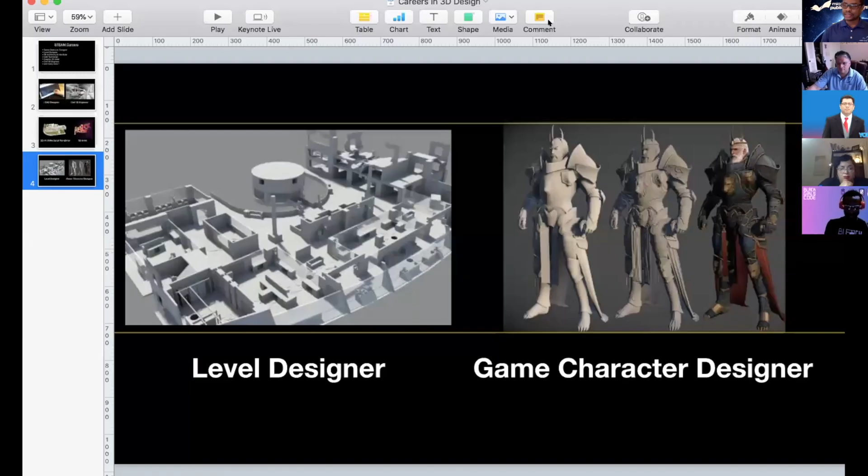Someone was asking if they can share their design. It's possible if they have it. We're not going to do that because I'm going to give you guys a challenge. We emailed you all the directions and instructions. Send us back your design, email it to us, and we'll make sure we share it not only with everybody, but to our social media, so you can all see it, because we want to see what you're making. That's the whole idea of it.

So share it, like Hector showed you how to go to the share page. You can go to that, share it, and then export it. Can they export it as just a flat JPEG, or does it have to be the whole project? Actually, when you go to the share page, you can send it as a PNG, which is the file format it saves it as. So you're able to share it, and that's really cool.

If I could chime in, it sounds like they were talking about things they made in Blender, not in Tinkercad. Oh, okay, well yeah, that's the thing I was getting ready to talk about next. But I still want to see, I think everybody wants to see, what things you guys can create in Tinkercad, because we've only had these two classes. This is the last class for Tinkercad, but it would be really neat if we see some of the things you all are creating.

By the way, just off the top of your head, how many people have already created their own Tinkercad account, since we sent out the instructions? Have you guys done that already? Okay, I see a couple of people. Most people are saying yes. Excellent, very good, yeah, it's free.